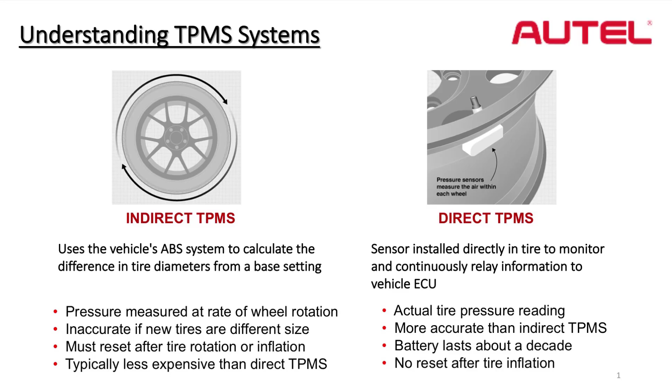Direct systems use tire pressure monitors installed in each tire at the valve location, and it also uses an antenna system to read radio frequency signals from those sensors. In addition to that, there's a driver information center that will warn the motorist when there's a low tire pressure condition.

So how does a TPMS sensor work? Or how does it actually transmit data to the vehicle? So that's what it actually does. There's different ways to sort of wake up a TPMS sensor and get it to send information to the car. So what are the different ways that we can activate a sensor?

A loss of tire pressure will cause a sensor to activate and send a signal to the car. A pressure deviation of approximately 25% of the vehicle's placard value, that's the factory recommended pressure, that'll cause a sensor to activate. Also on some older vehicles, you could use an activation magnet in order to get the sensor to wake up when you're servicing it in the bay. These will probably be familiar to you because they're on the side of a lot of people's toolboxes.

Another way is we can use a TPMS tool like the TS508 to send a 125 kilohertz radio frequency signal to the sensor by means of the tool, and that will cause the sensor to wake up. So sending the 125 kilohertz to it with a TPMS tool is a way that, in a service environment, we can force that sensor to transmit and send information to the tool where we can collect it.

Another way TPMS sensors are activated is through centrifugal force. As your vehicle speed reaches over 20 miles an hour, the sensor automatically transmits its signal with increasing frequency due to the accelerometer located in the sensor. At sustained highway speed, your sensor, for safety reasons, wants to transmit as frequently as possible to the vehicle, so if there's a tire pressure loss event, the driver is warned right away.

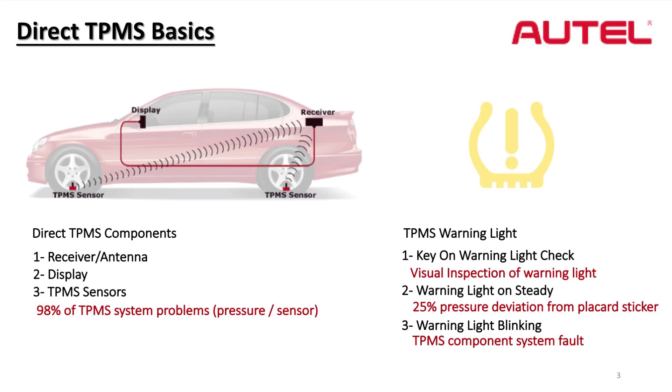So in addition to the receiver or antenna that receives the signal, you have the display on the dash and you have the TPMS sensors themselves. All vehicles are equipped with a TPMS indicator light, and it's important to understand when you visually inspect the light: if you have a solid light, that means there's a pressure problem. If the light is blinking, that means there's some type of equipment failure within the system. The TPMS light will always be part of a standard bulb check—when the ignition is put in the on position, you'll see that light illuminate as part of the general bulb check.

Each vehicle has unique sensor IDs at each location, and the reason for that is so when two vehicles are going down the road next to each other, one car is not picking up the signal from another vehicle's TPMS sensor transmission. So it's very simple, but all we want to do is make sure that the IDs at the wheels and the locations match the ID and the location that the vehicle thinks they're in.

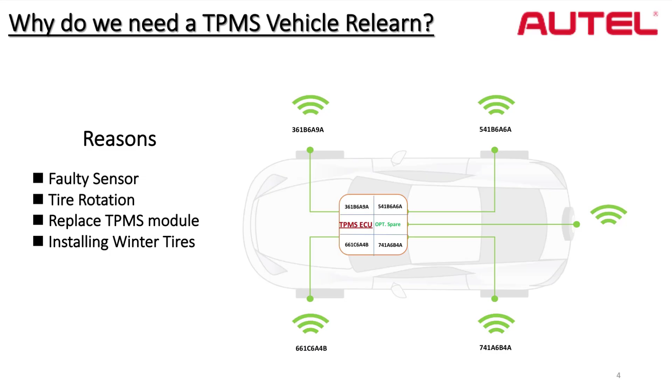In the case of a faulty sensor, we're adding a new ID to the vehicle, so we'd need to teach the vehicle that ID. If we're performing a tire rotation, all of those wheel locations and those IDs are going to change relative to what's in the control module. So we need to teach the car that we moved those tires around when we did the rotation. Also, if we replace the TPMS computer itself, when that new part comes from the dealer and we install it, the information that's not going to be in that controller is going to be the TPMS IDs and the locations of the wheels.

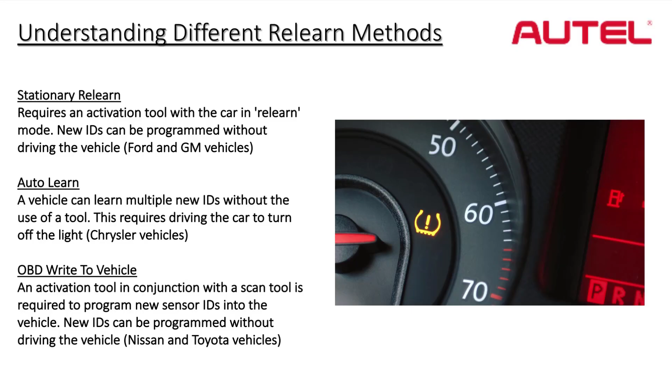So how does OBD write to vehicle work? That's our third relearn type. OBD write to vehicle involves activating each of the sensors with a TPMS tool, like the 508, and you would start by activating the left front, right front, and the subsequent tires, and the tool retains that information—it knows the ID at each location and knows the location of that wheel. The tool will then ask you to plug into the vehicle's diagnostic port with the included OBD2 cable, and then you can instruct the tool to upload that ID and location information to the vehicle's control module through the DLC or diagnostic port.

So a lot of Asian vehicles utilize the OBD write to vehicle method. So those are our three different categories of relearn procedures.

Really important to know: there are several different types of aftermarket sensors available on the market. In years past we'd call our parts store, they'd send over a part that supposedly was correct for the application we had, and sometimes we weren't sure how to properly implement that sensor because we didn't know what type it was, and the counterperson at the parts store couldn't tell us that information either.

So there are three different types of aftermarket TPMS sensors. The first one is direct fit. Early on, parts manufacturers were creating individual part numbers and sensors compatible with each application, and the effect was that some companies had 40 or 50 or even more different SKU numbers or part numbers available. So you really needed to be lucky to call and have the correct one in stock, let alone four of them. So direct fit sensors are the first category—one part number for a specific vehicle application. There's no adaptability there, and in such great quantities it's really impossible to stock those sensors, so you're always stuck waiting on a parts delivery.

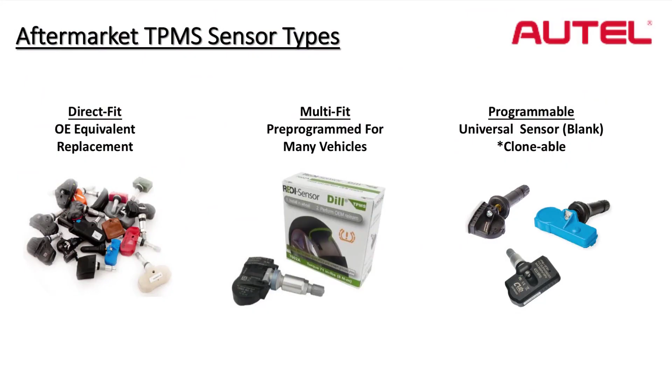So, programming methods. Although we have our blank sensor here, we have a vehicle we want to install it in, and we need to choose the correct method of programming this sensor. There are 4 different ways that we can ask our tool to create a sensor for a specific vehicle application.

The first method is called copy by activation. This involves taking the original sensor that you need to replace. In some cases the valve is damaged or the body of the sensor is damaged, and you'd want to recreate that sensor ID on a new sensor. So what you can do is activate the old sensor. The tool will take the ID information and the vehicle application from that sensor and put that information onto a universal programmable, and you can install that. The vehicle can't tell the difference between a programmed blank sensor, the universal programmable, and the original sensor.

Copy by OBD is the second method for programming universal programmable sensors, and this is virtually exclusive to Autel, one of our innovations. When we talked earlier about the IDs at each wheel location, and the idea that those IDs are stored within the control module in the vehicle that handles wireless systems, what we can actually do is, even if a sensor is missing, broken, won't activate, and we can't get any information off of it, we can use our TS508 or TS608 tool to plug into that car's diagnostic port and ask it: what ID used to be at this location, or what ID are you expecting to see transmissions from, say the right rear? And it'll know that information. I sometimes use the example that if you're on a road trip and get stuck, the local mechanic may not have a TPMS sensor or know how to service those systems, and might put a rubber valve in that tire just to get you home so it'll hold air.

The third way we can program sensors is programming by manual input. What does that mean? If you look at a factory sensor, you can see the sensor ID, whether decimal or hexadecimal, stamped on the side of that sensor. Using the arrow keys on our tool, we can manually input that decimal or hexadecimal number. It takes a little bit of time, and there are faster ways, but we do offer the ability to manually input the ID from an old sensor onto a new sensor for a specific application.

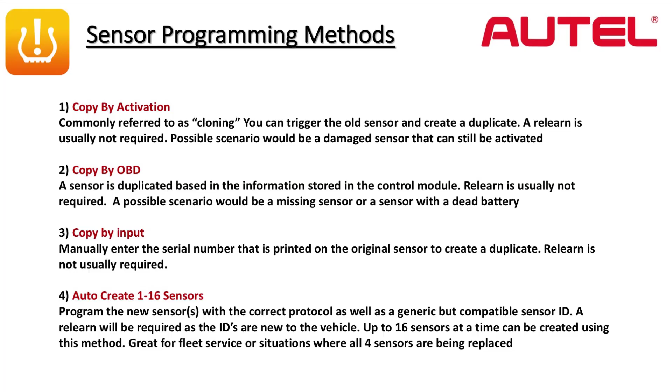The fourth way is called Auto Create. On the slide, next to Auto Create, it says Auto Create 1 to 16 sensors - another unique offering from Autel. We can take our tool and program up to 16 sensors at a time. So if you lay them out on the table, you could take the tool and program all 16 for a specific vehicle application.

The only difference between this method and the other methods we discussed is that all of the batch programmed sensors will have unique IDs and they're not based on any existing sensor information in the vehicle. So that's an important distinction.

But if we're servicing fleets - police, fire, medical personnel vehicles - we can create a bin for each type of fleet vehicle and have them pre-programmed and on the shelf ready to go. Also, if we're servicing one vehicle and we know we're replacing all 4 sensors, we could put 4 sensors on the table, choose Auto Create 1 to 16, batch program those 4 sensors for a specific vehicle, do our relearn, and then we're on our way.

So let's move on. We just covered the 4 different programming methods. What I want to do is discuss Autel's diagnostic process. We're a diagnostic company - our roots are in advanced diagnostics, module programming, bidirectional control, advanced scan tools, really.

Over the years, we've accrued so much experience from creating our diagnostic scan tools that we were able to take the information we needed for TPMS service from our larger tools and consolidate that into a very, very powerful and proficient TPMS program.

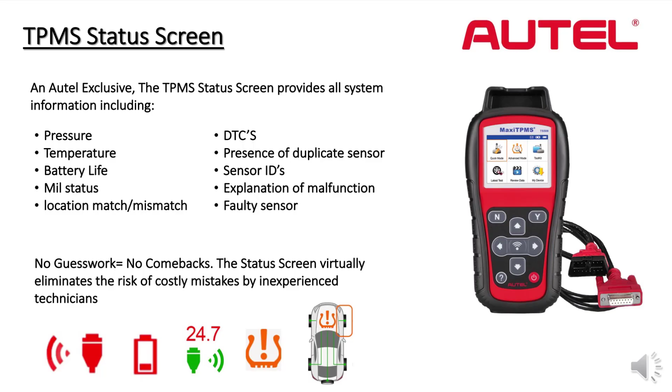Sometimes technicians in error will duplicate the ID on an existing sensor in the car, or they'll perform a copy by activation on one wheel and install the new sensor in another wheel. When you have 2 matching sensor IDs, it's very difficult, impossible in fact, for the vehicle to differentiate between those different systems or sensors. So you will get an equipment failure or a blinking light if you do have a duplicate sensor ID in most cases. Also, we make it very simple.

We'll give you an explanation of the malfunction. We'll actually tell you, through a simple, easy-to-read icon-based system, what the issue is. Any icon displayed in red requires corrective action. Anything displayed in green is in good condition. So even if you don't understand the meaning of the icons, we give you a written explanation at the lower left-hand corner of the screen.

So we're going to take a quick walkthrough on what a diagnostic process looks like on the TS508, just so you can get an idea for how the workflow of the tool is organized.

As you can see in the illustration, this is a shot of our main menu after a vehicle selection has been made. After we choose year, make, and model, everything on the tool happens in sequential order.

Option number 1 is the item that's always designed for you to do first. We recommend always doing a TPMS diagnose. The second step would be, if required, to program a sensor, and the third step would be the position relearn.

So what we're going to do now is walk through a diagnostic process, and we're going to show you how to achieve the TPMS status screen. As with everything on the tool, instructions are displayed as soon as we choose the service item. In this case, we're going to choose TPMS diagnose, then you'll see your instructions.

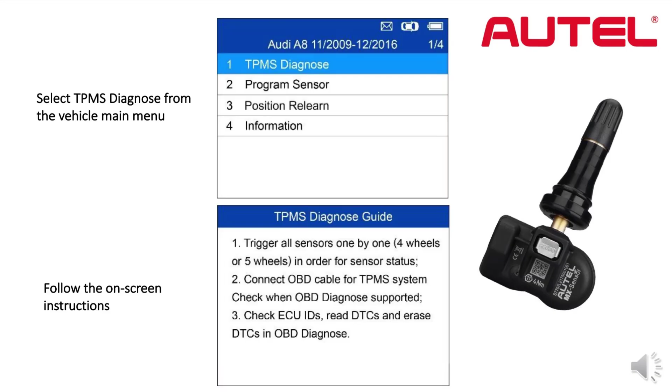It'll ask you to trigger all the sensors. So the first thing you'll do is activate your sensors, starting with the left front, right rear, left rear, and it will indicate if that vehicle is equipped with a TPMS sensor in the spare, as they sometimes are. So we go around the vehicle, activate each sensor, and the tool collects information from each wheel location. It's making a note of the pressure, temperature, battery life, sensor ID, all the things we discussed earlier. So the tool's retaining that information.

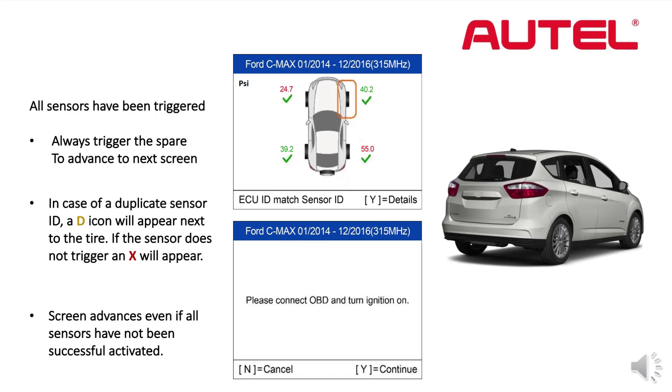After we're done activating the sensors, the tool will then ask you to plug into the vehicle's diagnostic port. In doing that, we communicate with the computer controlling TPMS in the car, and that's going to compare the physical wheel locations and sensor IDs with the wheel locations and sensor IDs stored in the vehicle's control module, because what we're looking to achieve is consistent information. So you'll see the tool ask us to plug the OBD2 cable into the diagnostic port, and after a short period of communication, just a few seconds, you'll see the TPMS status screen.

So we see a collection of icons, both in red and in green, and we see a picture of the vehicle. As you can see in the slide, it's very simple to interpret what the issues are with this system and what items we need to correct.

Right off the bat, we look at things in red. We can see that the inflation pressure in the front left and the right rear needs to be adjusted. We can see we have a low battery in the left rear, so we have a low battery condition.

Once we do this, it's an excellent opportunity to go ahead and call that customer and say, you have one sensor, we're installing the second set of tires that are probably going to last you the next several years, it would be a really good idea for us to replace all 4. Great benefit to the customer because they don't have to come back and have the tires broken down again.

As you can see at the right rear, you have the sensor activation icon, or the little wave icon, looks like Wi-Fi, and a little OBD cable icon that are displayed in red. This indicates that the sensor ID doesn't match the information stored in the vehicle, so we require a relearn to correct that.

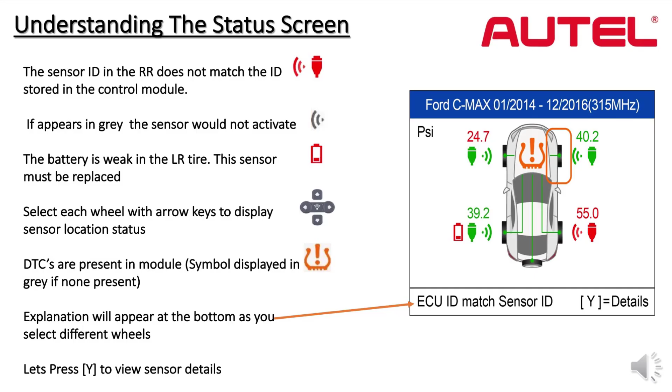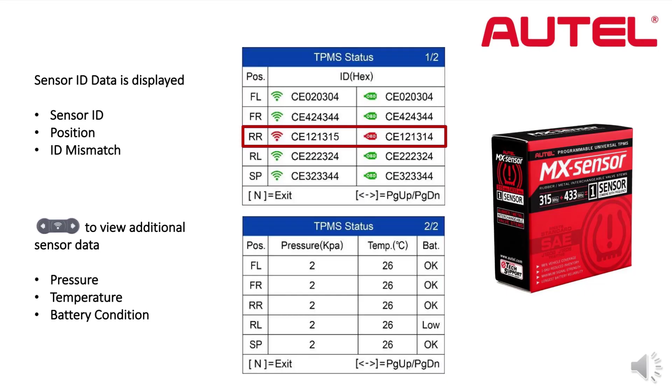If you choose, you can push Y for additional information or details if you need it, and it will indicate the other items to you. As you can see, like we just mentioned at the right rear, you have mismatched sensor IDs, which needs to be corrected, along with the other relevant information like pressure, temperature, and you see that there's a low battery indication at the left rear.

That's a quick way to show you how easy it is to perform a TPMS diagnose and achieve the TPMS status screen, as well as interpret it on a TS508. Here's an example of how we retrieve diagnostic trouble codes on the tool. We select the TPMS icon on the hood of the car once we've completed our TPMS diagnose, and we'll see it gives us the code and a description of that code.

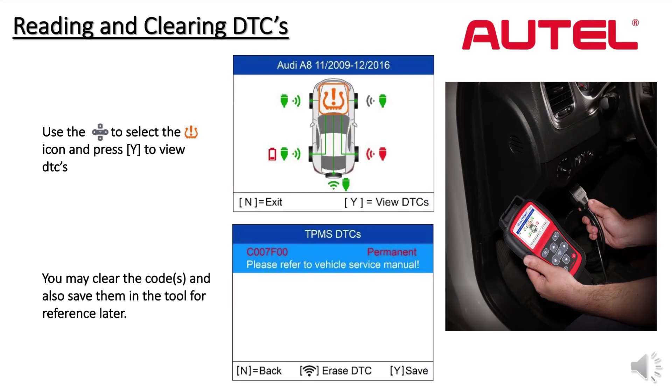So, hey John, a couple of quick questions here. I wanted to stop you for a minute before we move on to the rest of the presentation that seemed to come in from the group. One that a lot of them are wondering about is, will the Autel tool work with all sensors rather than just the Autel MX sensor?

Sure, Mike. So any car that comes into your bay, the Autel tool will be fully compatible with. So you could service any vehicle that comes through the door. When you're replacing a sensor, the only blank or universal programmable sensor that can be programmed by the Autel TPMS tools is the MX sensor. In terms of aftermarket, it's compatible with direct fit sensors and also multi-application. Because of the coverage level we have and the continuity that exists, because we're the only ones that make the tool and the sensor, there really would be no reason to go beyond our complete solution.

Excellent. And some of the guys were asking, when we talked about batteries, can you replace the batteries in a sensor, whether it's the Autel or the OEs or others? That's a good question, it's something we get fairly often.

The sensors are designed to put up with a very high level of corrosion and temperature differential, so they're very well sealed, and they need to be able to withstand all of the water intrusion issues, moisture, and pressure that can happen inside the tire environment. So they are sealed, and as a result, the batteries are not serviceable.

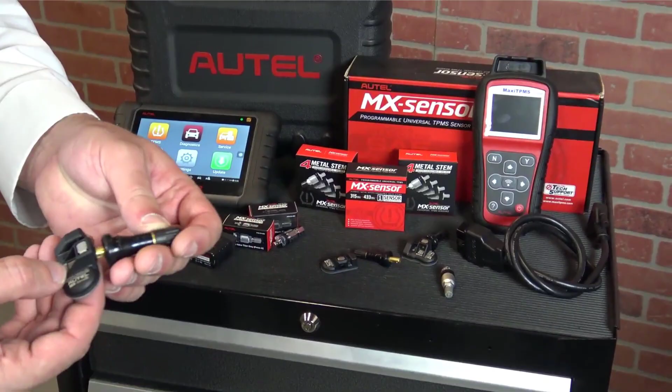One of the features we really like about the MX sensor, in addition to the multitude of applications it covers, is it actually has a push button valve stem release system. So I can take this sensor and push the button here, release the rubber stem, grab a metal stem, and insert it until it clicks into the very sturdy retention system. So all we have to do is swap the stem and install the sensor.

Very, very simple. The sensors ship with rubber stems, but they're also available with metal stems. However, the stem kits themselves come in packs of four, so you can get the metal stems or rubber stems in packs of four.

There are a lot of advantages that come with being the only company in the world that produces both a tool and a sensor. The same engineers that design the software for the sensors and the electronics also design the tools themselves, and we test and validate all of our applications in-house. This gives better compatibility, a higher rate of successful outcomes when performing TPMS-related repairs, and our tech support is extremely knowledgeable on the tool and the sensor itself. So our support is really your one-stop shop for any issues with your tool or your sensor.

This is the TS508, Autel's flagship TPMS tool. This tool will address any vehicle that needs to be serviced in the bay for a TPMS-related issue. It's available in two different variations, the TS508 and the TS508 Wi-Fi. Functionality, coverage, and tool operation are exactly the same. The only difference is technicians have the option with the Wi-Fi tool of updating the product through the shop's Wi-Fi network, whereas the standard TS508 is connected to a PC through a USB cable and a program installed on the computer to update it.

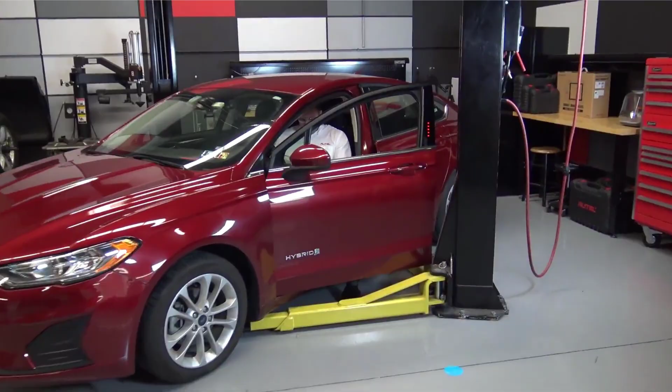The tool's reading the sensor IDs, checking diagnostic trouble codes. Okay, and it's running through a quick system test.

Read ID successful and read DTCs successful. So we'll press OK. And I'm going to unplug from the vehicle.

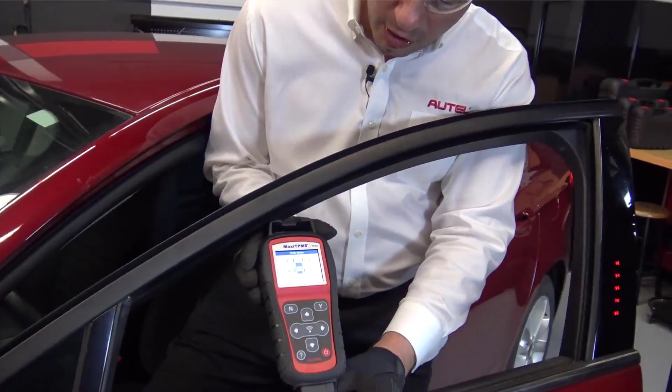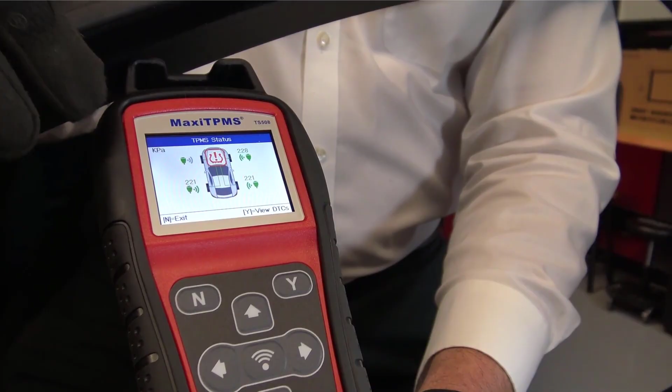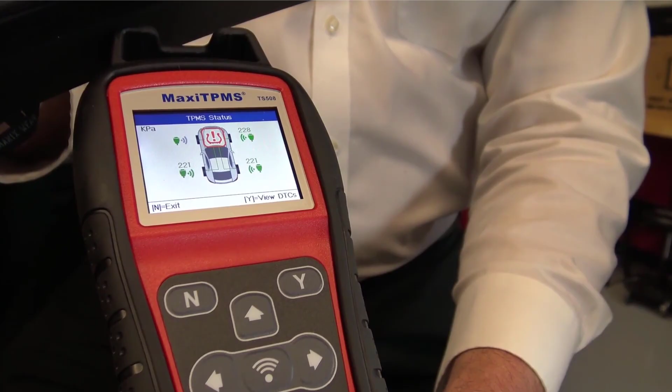And we're going to talk about the status screen. So if you remember what we reviewed earlier, the tool then displays the TPMS status screen. As you can see, the front right, right rear and left rear activated correctly. If we look at the front left, we can see that the activation icon, what looks like that little wave icon, is displayed in gray, and that indicates we have a faulty sensor that failed to activate. We also have TPMS-related DTCs because the TPMS icon on the hood of the vehicle is illuminated in red.

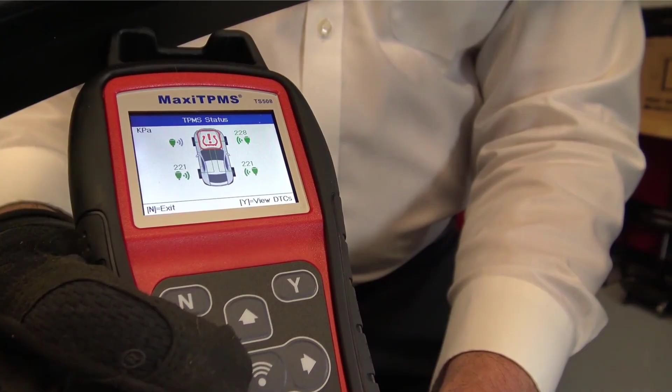We could also use the arrow keys, and as we select each wheel location, you'll see a written explanation at the lower left-hand corner for each malfunction. Okay, so you can see as we select each wheel, it's going to tell you the nature of the issue.

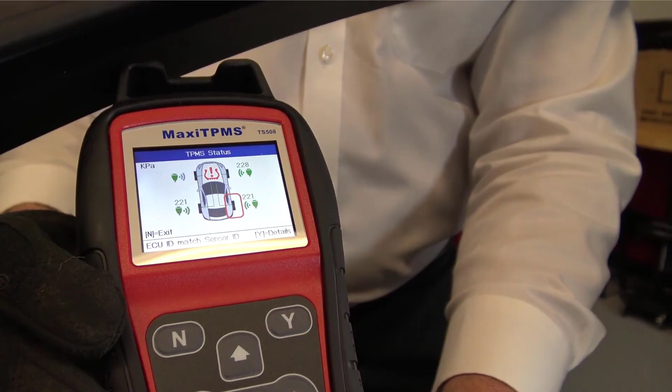Okay, so we've come to the conclusion after our diagnosis that we need to replace the sensor in the front left wheel. Okay, so what we're going to do is, we have the car set up, we're going to lift it, remove the wheel, and get over to our tire machine.

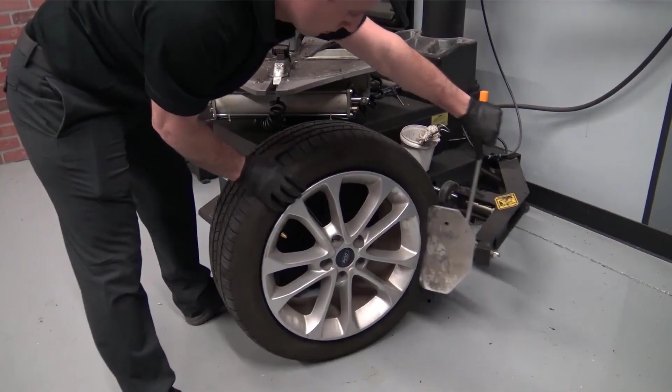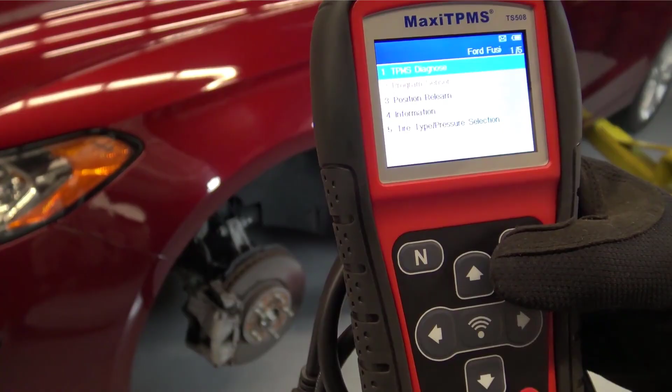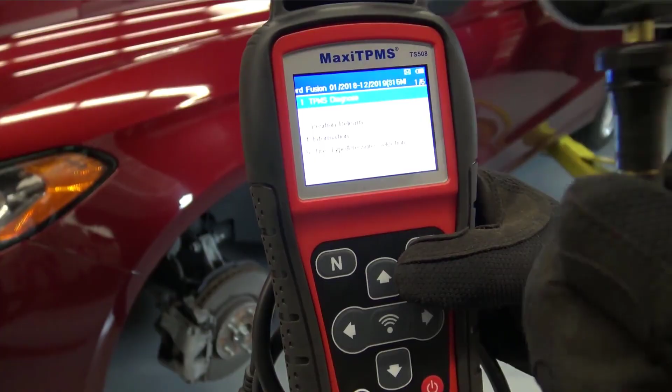So now we've determined that we need a replacement sensor for our Ford Fusion. And the next step is creating or programming a sensor for this vehicle application. So we're going to take an Autel 1 sensor. Now remember, these are universal programmable, so they're blank, so we have to create a sensor or give it the identity that is compatible with the Ford Fusion.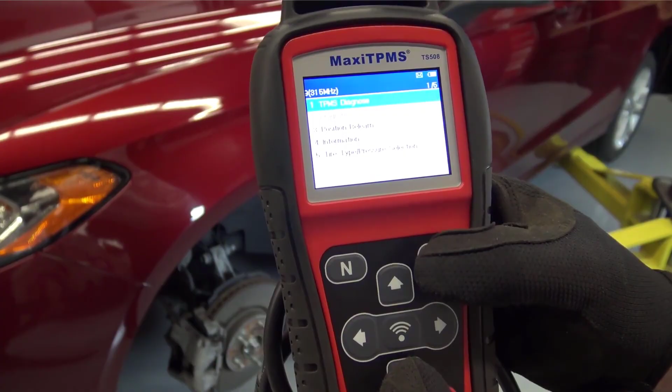So what we're going to do is, on our vehicle main menu, we see TPMS diagnose was the first step. We're going to move on to the second step, which is program sensor, and we'll select that. And in this particular case, we're going to use the auto create sensor programming method.

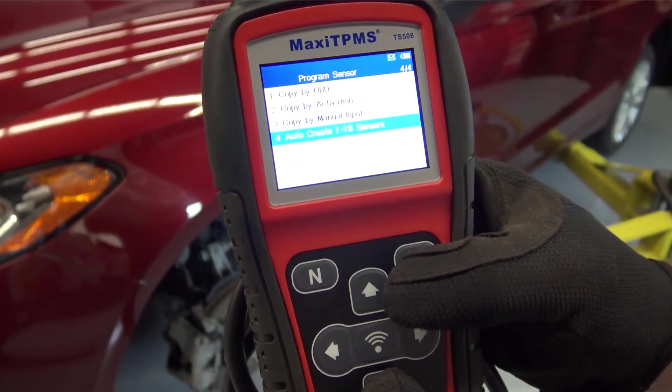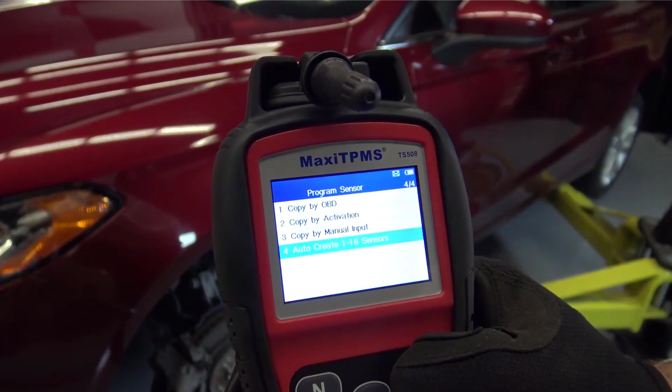So all we do is place our sensor at the top of the tool in the cradle, and you don't have to do this, but it's great for one-handed operation. And let's press Y. The tool will search for sensors, and we see one sensor detected. Do you want to continue?

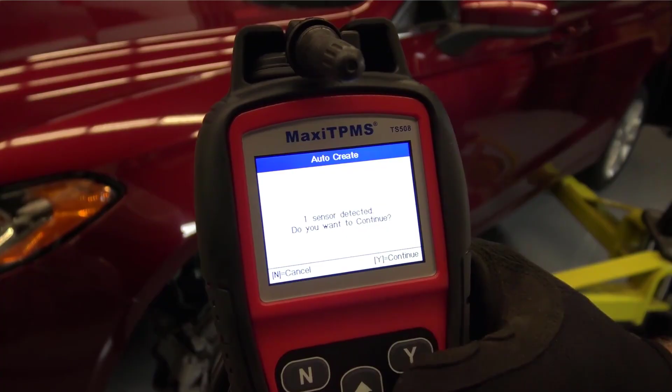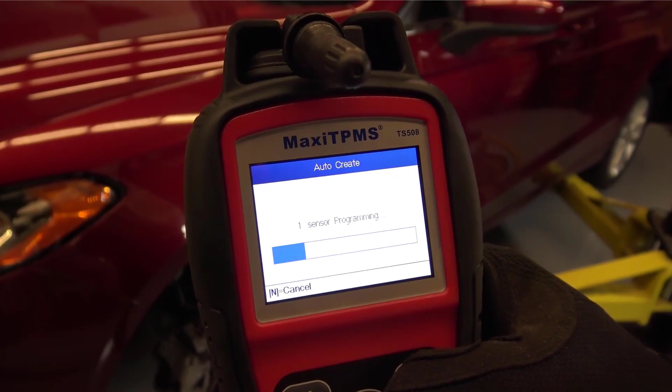So the tool is asking us if we want to program the sensor for the Ford Fusion. Let's press Y. Okay, so now the tool is teaching this one sensor how to perform exactly like a factory sensor for this car.

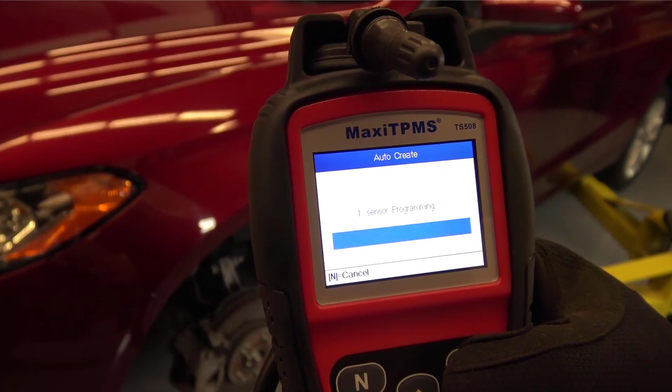Okay, so now we've created a sensor that is compatible with the Ford Fusion, and we're going to go ahead and install it and then perform our relearn procedure.

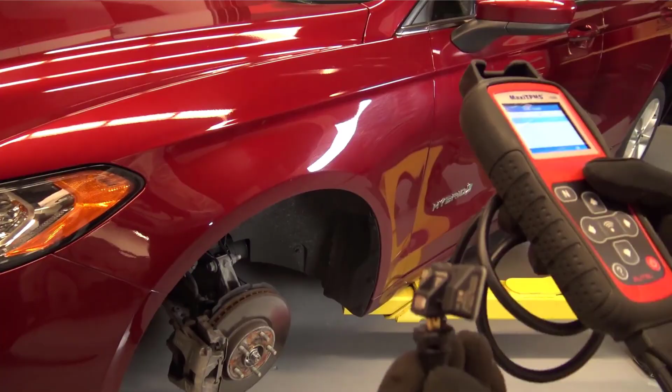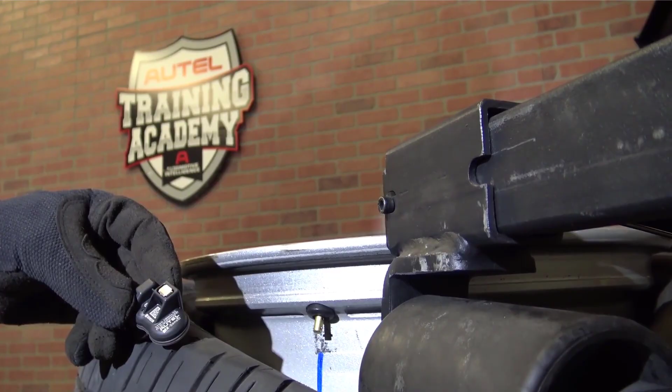So now we've installed our replacement valve, and one of the things that's unique about the Autel MX-Sensor 1 sensor is we have a push-button stem mounting system. So there's no longer a requirement to tighten a torque screw to secure the sensor body to the valve stem. So all we have to do is simply press the sensor body onto the base of the stem, and it'll snap right into place, just like that. Very simple.

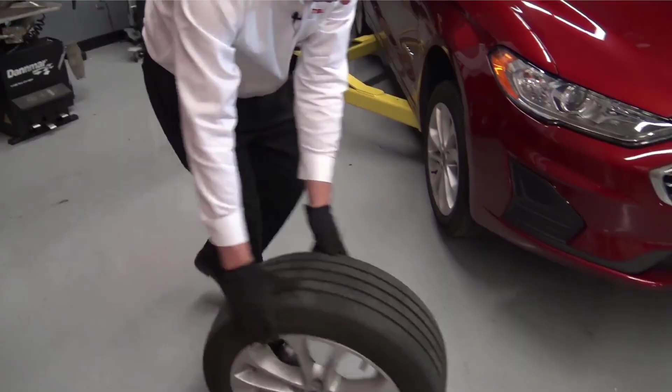So now we've completed our sensor installation in our 2019 Ford Fusion. Now comes the point where we have to perform a relearn on this vehicle.

Anyone familiar with Ford relearn procedures understands there's a higher degree of complexity to those procedures. Fords with ignition keys require you to cycle the key off to on 3 times, pump the brake, off to on 3 more times, and pump the brake again. This puts the car into train mode, and you'll be required to activate each sensor in sequential order. The horn will honk, and the car will recognize that the IDs have been registered, as well as the wheel locations. Getting the cadence and timing correct can be very difficult depending on the vehicle, and it takes quite a few tries if you're even lucky enough to get the car into learn mode. So Autel engineers identified this problem, and we created a solution for it.

In this case, it's even more difficult because this Ford is equipped with a push-button ignition system. It requires pressing the button on and off approximately 12 times and pushing the brake pedal sequentially to get that car into learn mode. We thought this was way too difficult and too complicated to carry out in the shop on a regular basis, so we thought about how we could streamline the process. Autel engineers have engineered a way to do the relearn procedures on these Ford vehicles with push-button ignitions using a simple OBD relearn procedure, similar to many Asian vehicles.

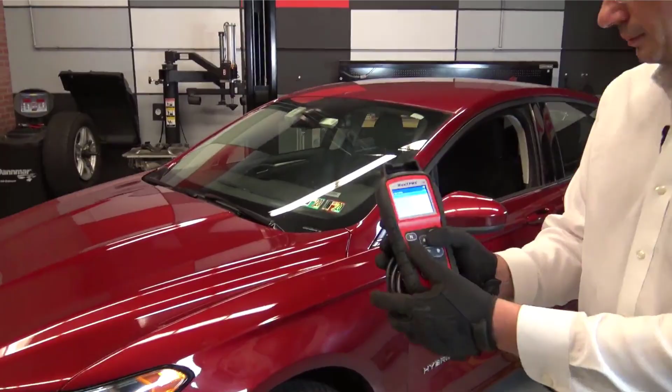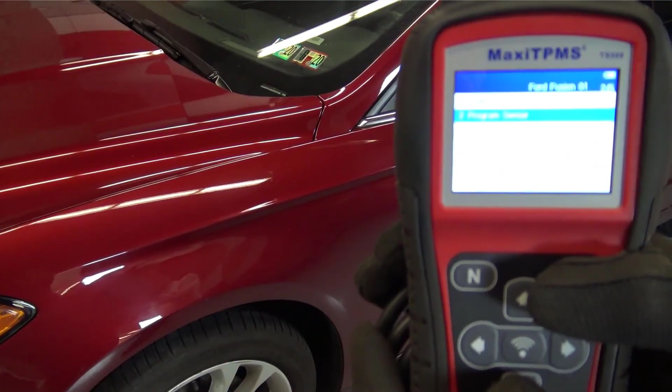Let's take a look at our menu system on the tool. We can see that we've completed our TPMS diagnose already, programmed and installed our replacement sensor, and now the third step is the position relearn. So we'll select the third step.

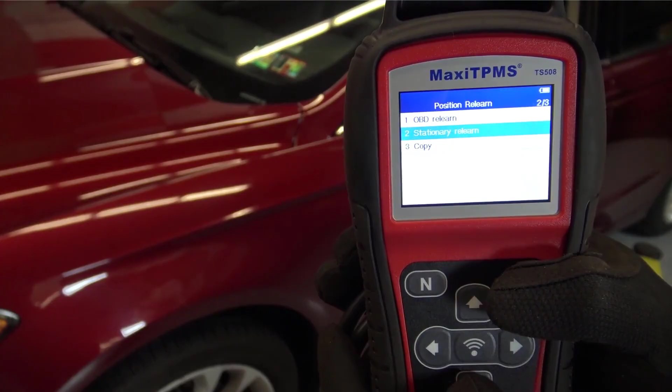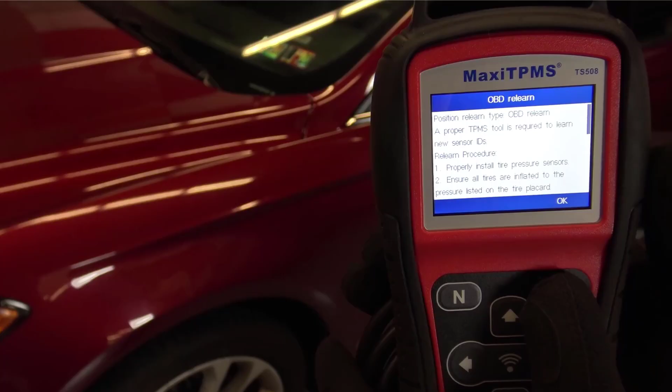Press Y, and as you can see, we offer different options. If you want to use the factory relearn method with pressing the ignition button or cycling the key, you can choose to do so with the stationary relearn, but we make it much easier for you. So select OBD relearn, press Y, and here are your OBD relearn instructions. As with all the processes on the TS508 and 608 tool, everything is explained to the technician as they go through the repair process.

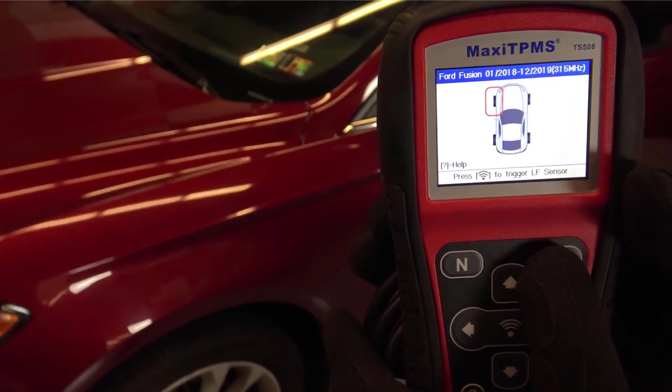So we've read our directions. Let's press OK. We'll see the picture of the car, and then we're going to move on and activate each one of our sensors, starting with the left front. Okay, it activated right away because we installed our newly programmed sensor.

Now that we've completed our sensor activation, the tool is asking us to plug into the vehicle's diagnostic port to upload the IDs. So now we're communicating with the vehicle and uploading the new locations and the IDs of the sensors. We'll just let it go through that process.